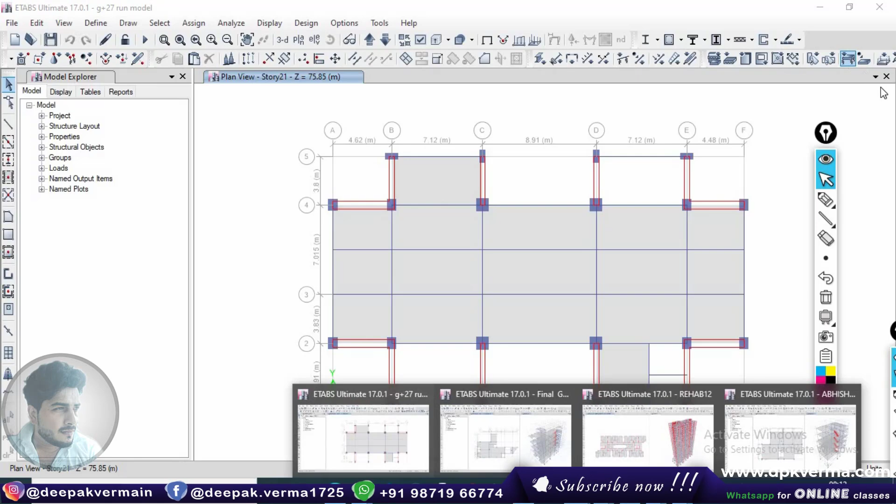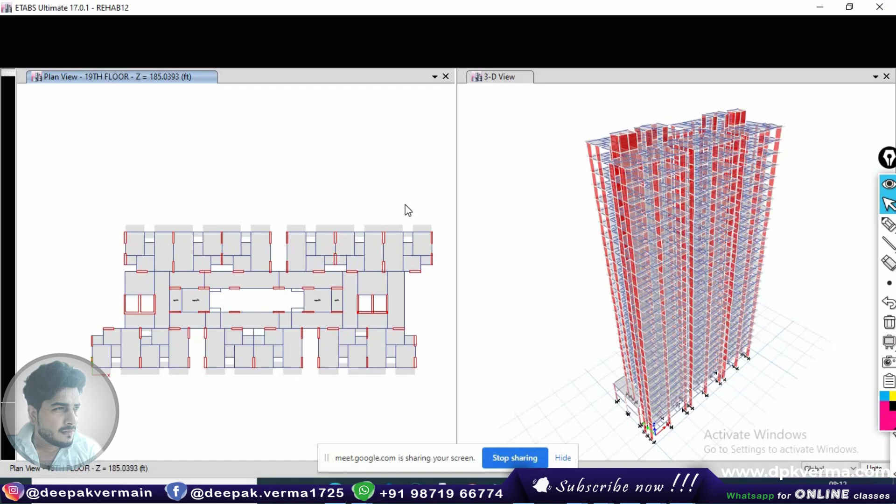So here are some ETABS models you will be working on. This is a high-rise building model which I will explain in our session. If you change the model, the concept will be the same. I have a number of models, but at the initial level you will not get all those things, so first try to understand the concept - everything will be similar, just a few concepts will be different. At the initial level we will be covering this ETABS modeling.

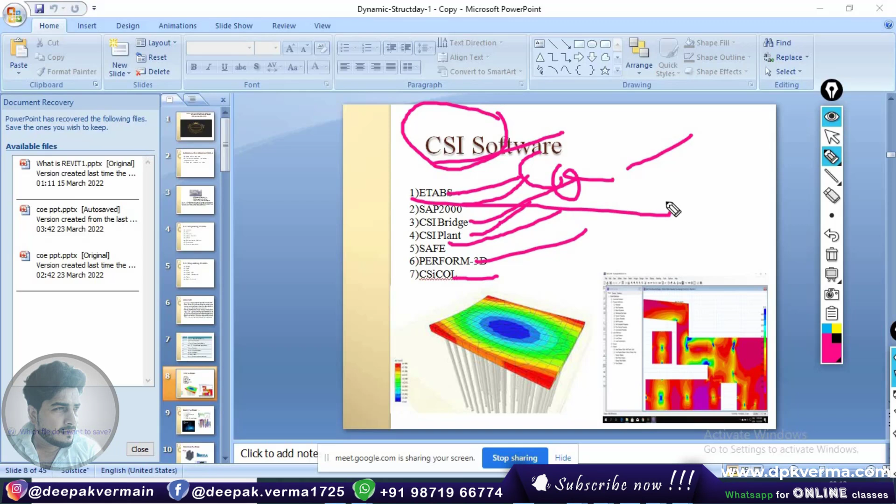CSI software - CSI is the name of the company, Computers and Structures Incorporated. These softwares are ETABS, SAP2000, CSI Bridge, CSI Plant, SAFE, Perform 3D, CSiCOL. Among these, ETABS is very important, especially for RCC building design, though we can also design a few steel structures. Mainly we use ETABS.

We can also use STAAD Pro. The difference between STAAD Pro and ETABS I will discuss in our coming classes, after you join our course. Just giving a brief introduction about the different software - CSI also made different software for steel structures.

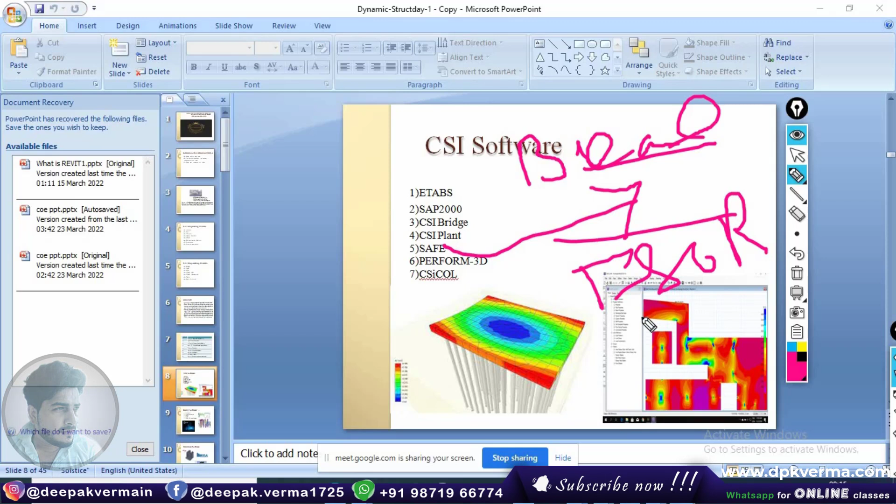What we can do in ETABS: beam, column, we can apply load on the slab, and for footing - isolated, combined, raft, raft with pile - everything we can design in SAFE. In STAAD Pro also there is superstructure and STAAD Foundation. In the same way we have SAP from the CSI company.

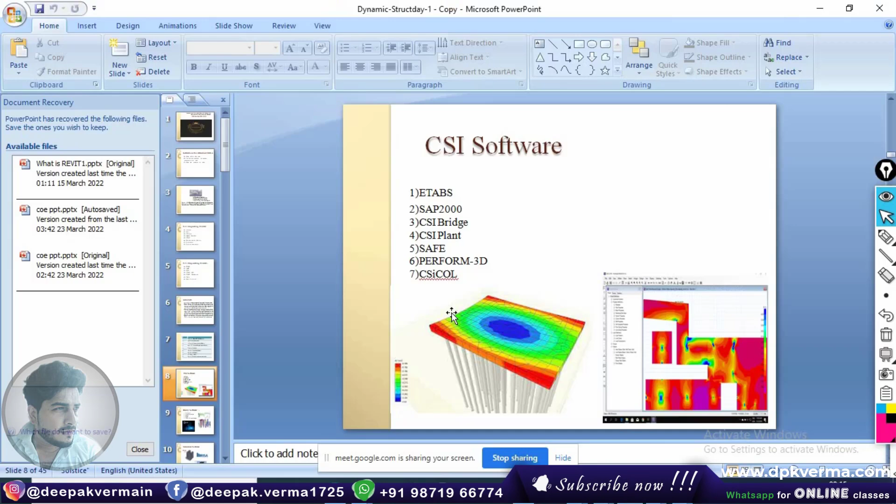We will be using this from next session, or after completing ETABS we are going to conduct the course of SAP plus RCDC. After that, Bentley, which is the name of the company who developed this software, STAAD Pro. Another is RAM, OpenBridge Designer. They have different software. There are a number of companies, not only Bentley and CSI, who made structure design software.

For RCC or structure at the initial level, it is better for you to learn ETABS. It is very easy. If you are at graduation level, it will help you complete your project. After that you can clear your concepts, or if you are pursuing post graduation, it will also help with your project. You can complete your project on STAAD Pro too, no issue. But why ETABS? Because the ETABS user interface is developed and adapted every year with changes, so compared to STAAD Pro it is very good, upgraded, and more user friendly.

First complete the first level, then we will use SAP RCDC. So just now I am explaining different software. At the initial level, ETABS is best. When you are learning, you will come to know its importance and how it is easy.

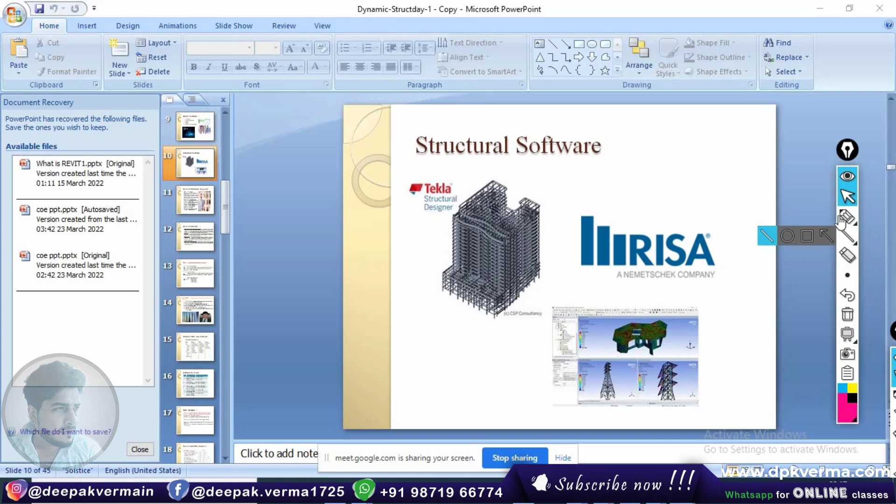Just a brief introduction I am giving - the role of a structural engineer. Most students don't know at the graduation level how a structural engineer works in a consultancy, so you should know the role of a structural engineer. Key tasks include preparing reports, design and drawing, making calculations about load and stresses, and selecting appropriate construction and material. For example, if a client approaches you wanting to construct a PEB, pre-engineered building, or steel structure, you should give an economical result - whether RCC or steel structure is economical. Only if you have knowledge about it can you give an economical result or suggestion. You should have knowledge about it.

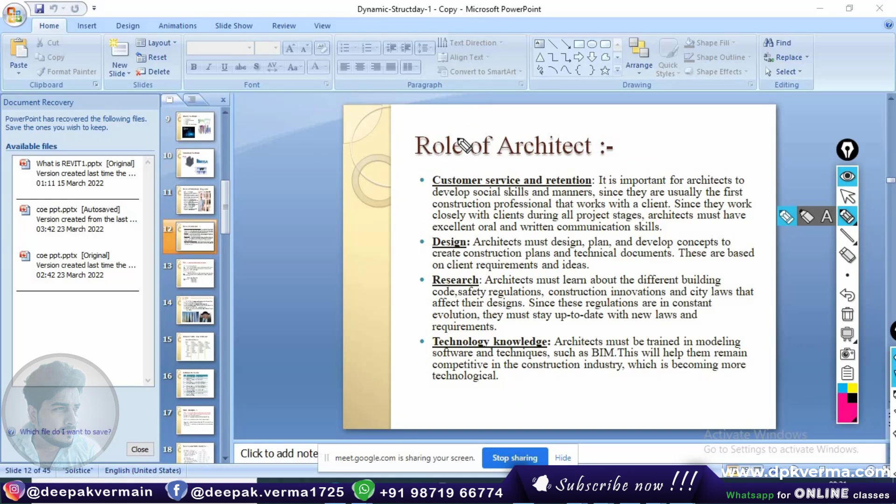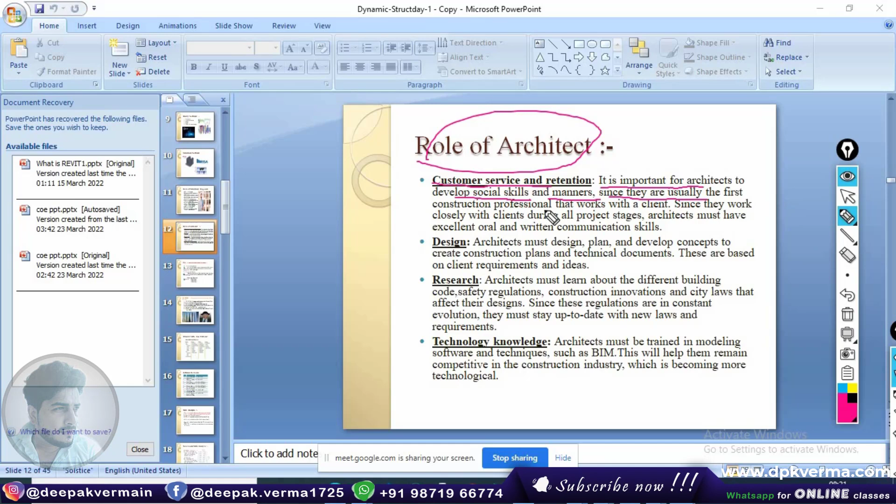The difference between the role of architect and structural engineer you should know. Customer service and retention: it is important for architect to develop social skills and manners since they are usually the first construction professional that works with the client during all project stages. Architect must have excellent oral and written communication skills.

Suppose Deepak Verma sir is the architect and I am a structural engineer - I should have very good communication skill. Not only with the architect, but with your client too. If you are architect, you should have good communication skill, be presentable, and convince the client. This is the role of architect.

Architect must design, plan, develop concept to create construction plans and technical documents. These are based on the client requirement and ideas. This is basically the difference between architect and structural engineer - a few points are collected in this PPT.

Research: Architect must learn about different building codes, safety regulations, construction innovation and city laws that affect their design, since these regulations are constantly evolving and they must stay up to date with new laws and requirements. This quality will enhance the architect's profile.

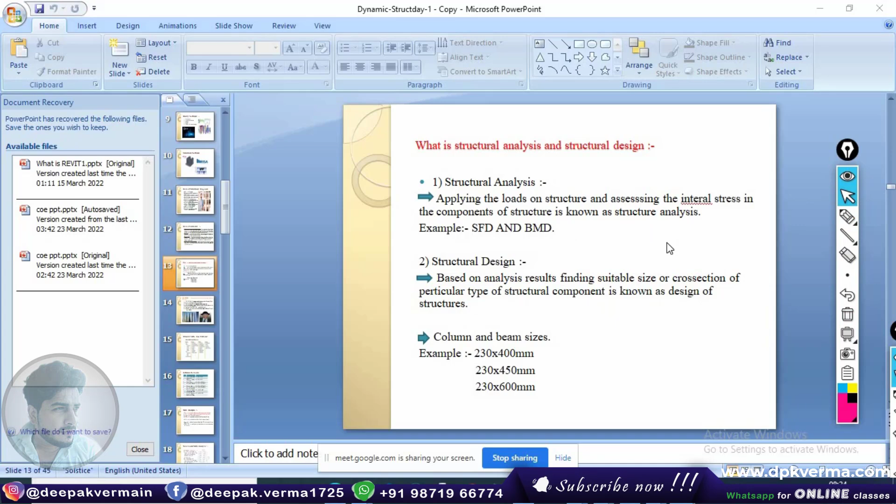What reinforcement area is needed for the section? What should be the suitable size needed? How much concrete is needed, and what amount of steel is needed to take that much load or satisfy that moment? This is just the basics of structural analysis and structural design that we learned in graduation.

Now basics about ETABS. Full form of ETABS is Extended Three-Dimensional Analysis of Building System. CSI ETABS - CSI stands for Computers and Structures Incorporated, the name of the company under which banner they developed this software.

They made this software. Initially, ETABS software was designed by a group of people who were masters students in 1975 at Berkeley, California. Founder and CEO of CSI is Ashraf Habibullah - the man is now CEO.

ETABS was used to create the mathematical model of the world's tallest building, Burj Khalifa. That's why we are taking the name of that - it's proven, used everywhere abroad.

While designing high-rise structures, we check the model using a number of software, not only one. After that, what ETABS can perform - while using any software, you should know the features of that software, its limitations and drawbacks. We should know this.

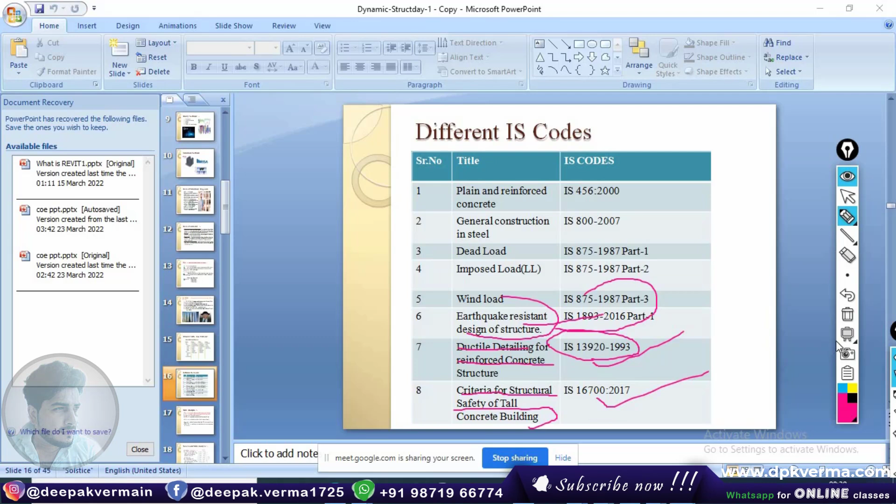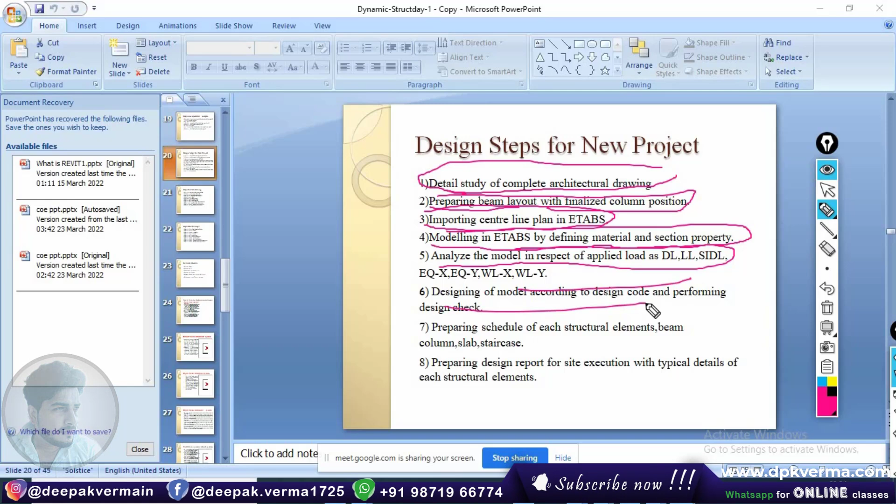If you are following that, you will get proper modeling, perfect modeling. We are training in such a way, like Deepak Verma training, that we perfect every software in a professional way - how we model it in a consultancy, we are explaining. Up to that limit we are teaching software. When we take any advanced course after that, we will be increasing our level.

May I know how many students are learning ETABS for the first time from this batch? Tell me in the chat box whether you learned before or this is your first time learning ETABS. Everyone, 22, 23 students are available. Your sir is asking about you. Okay, thank you for your messages.

These steps are very important, so we will be trying to complete them. Then preparing schedule of each structural element - beam, column, slab - and preparing design report for site execution, we will be explaining. Now we are entering the first step.

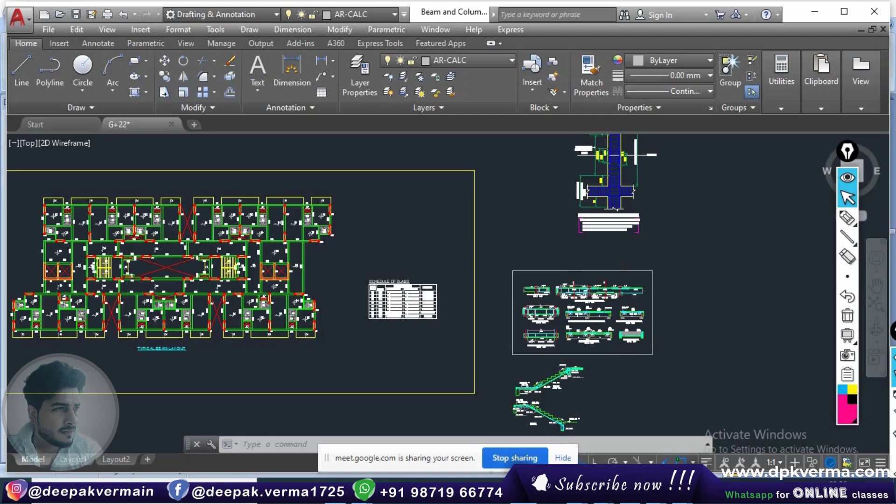Now we are going to the architecture drawings. First we will take G+3 for the modeling, G+3 complete. From that, see how many typical cases - I am having hundreds of projects in my PDF, but understand the concept, then you can make it.

Suppose you complete the AutoCAD course in 1 month or 1.5 months, you can draw a number of plans like that. First understand the concept in this course, you will get the proper idea. I am having different architecture plans on which we have worked, but I will not show those - basic plans I will be showing.

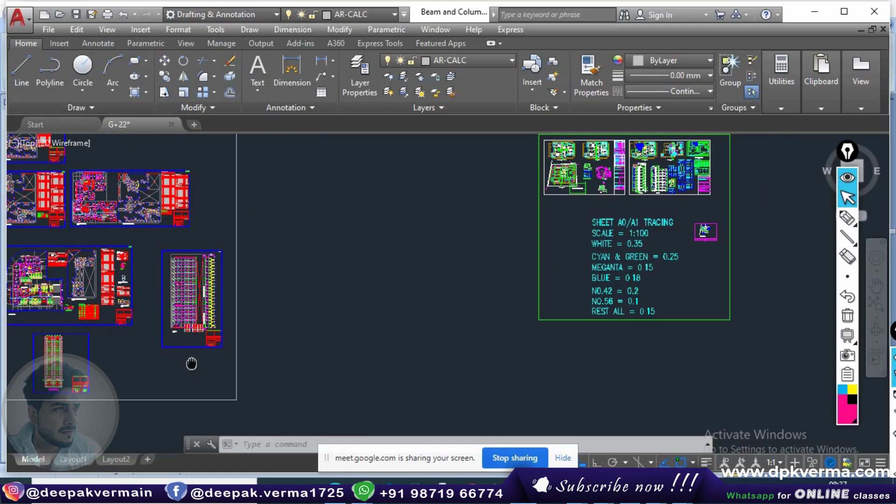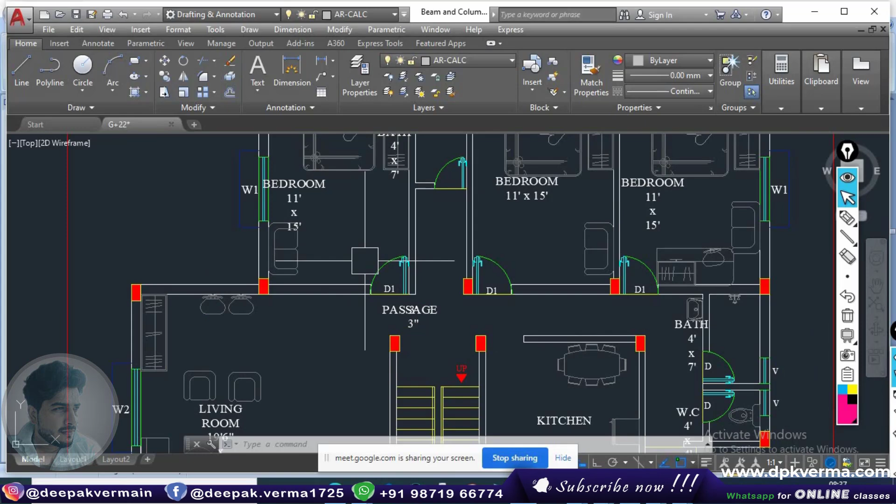At the initial level, suppose it is a G+3 complete building - ground floor, first floor, second floor, terrace plan is given. First you have to understand how the architect or civil engineer has planned that site - it's basic. Where is the bedroom, staircase, everything - you have to study it, so you can give suggestions to the architect on where to apply the column for stability of the building.

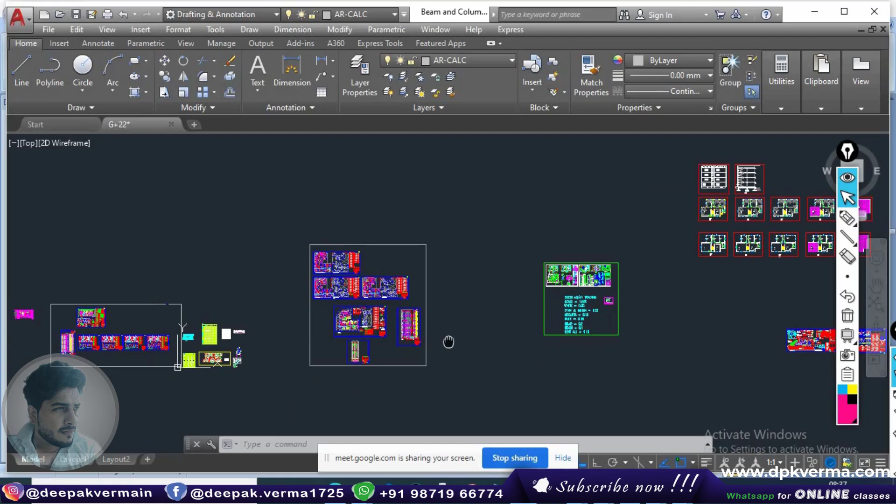I am having other plans like that too - suppose we are getting plans from the architect, such RCC structures I have worked on. You should read it - where is the bedroom, where is the lift, staircase - then you can look at the column positions and give stability where important. If the architect doesn't want a column anywhere, you can give the solution, or otherwise increase the size of the column there. This type of professional discussion happens between the people joining a construction project - between structural engineer and architect.

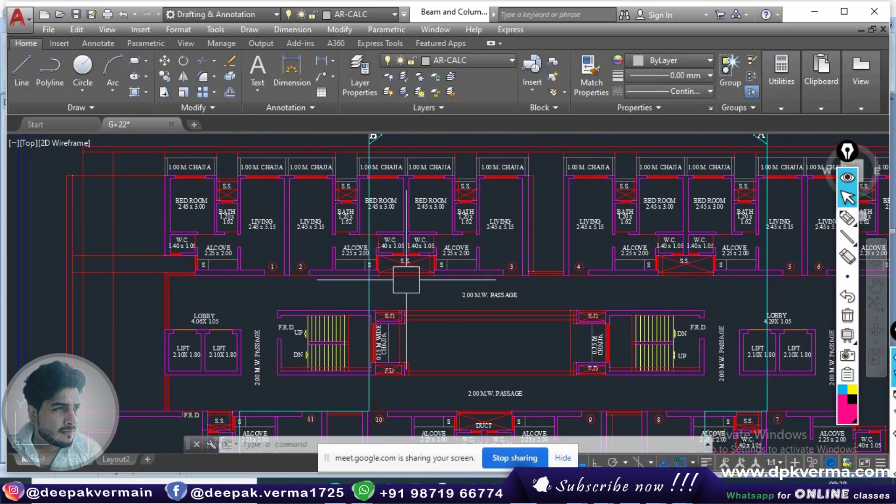Okay, structural engineer or architect provides this plan, after that we will be locating the column. Then you will be making beam layout. Just suppose such type of beam layout we have to make - typical beam layout you have to make.

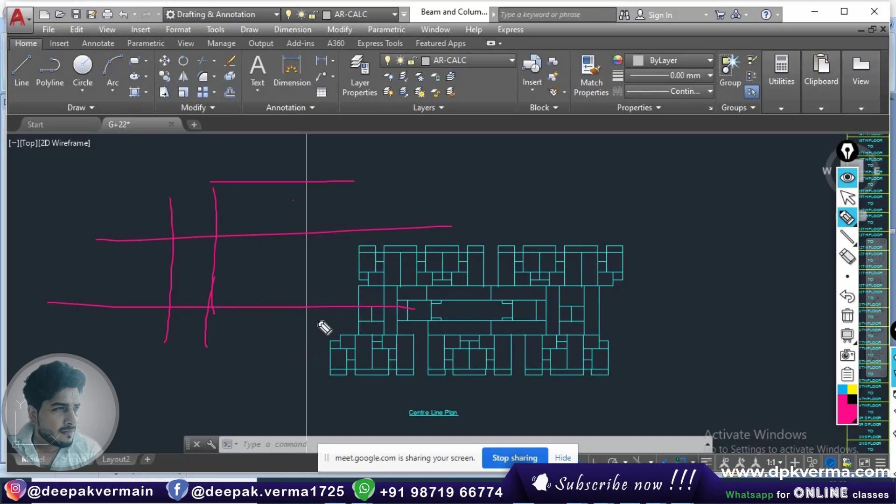Okay, how do you make a center line? There are number of methods to work in ETABS. You can draw the plan using grid - one method those who have used Revit know very well. Or other method is to make a center line in CAD, then you can import it.

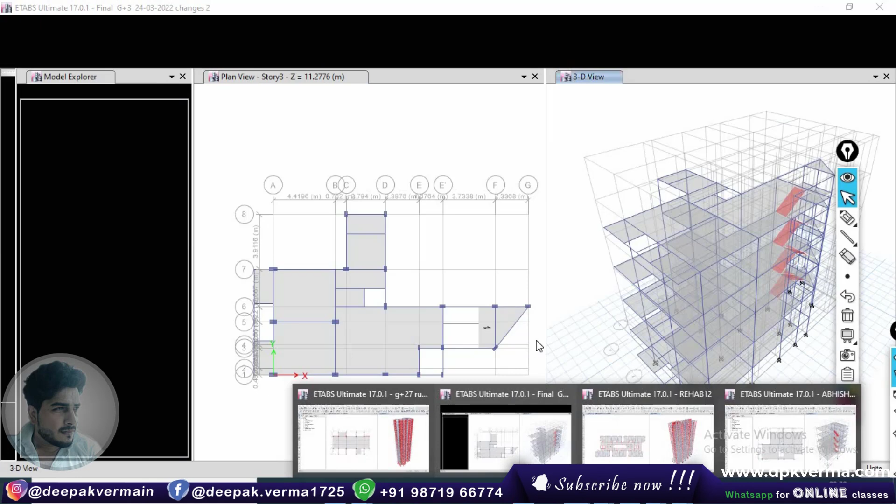For the small structure, making grid is easy. For the complex structure, you need to make a center line. Just I have made this basic G+3 structure using grids. Or suppose another structure, we have used the center line for this.

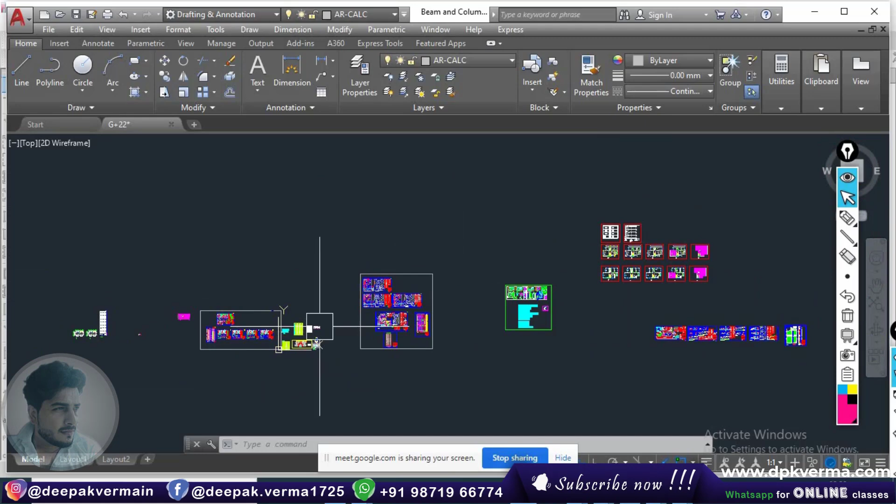So just basic, we are taking this project G+3, G+2, or 1 or 2 projects for practice I will be giving to you. Don't take tension, I will clear all your doubts. This high-rise project is also a live project, we will be taking this in our course.

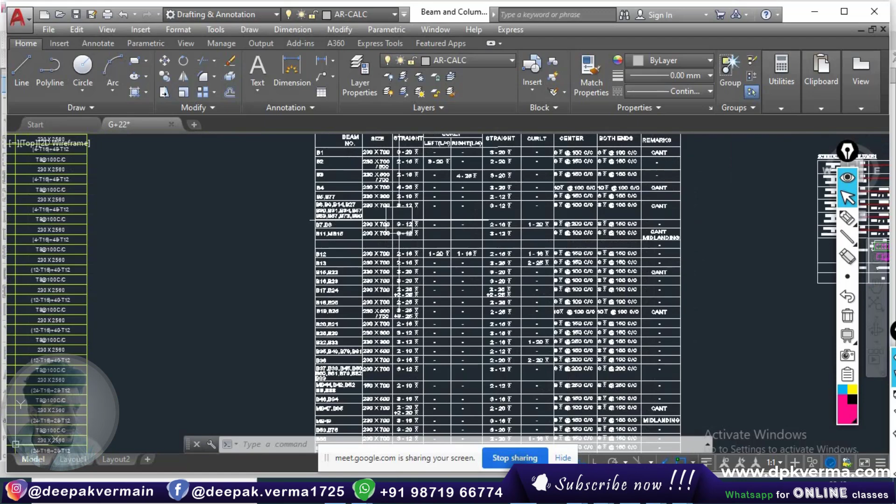Complete scheduling and detailing of low rise, or G+3, you will get the idea. Same method you have to follow for the high rise. We will be explaining about such type of schedule of beam, how to take the data from ETABS, how to make column schedule - we will be explaining properly.

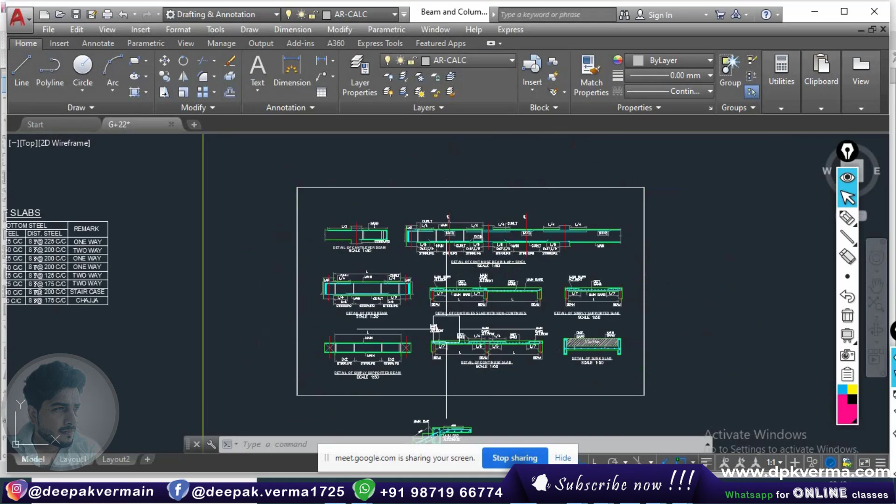How to make detailing - basic important points we will be discussing. Detailing of slab, beam, staircase, everything we will be discussing, and how to make slab schedule.

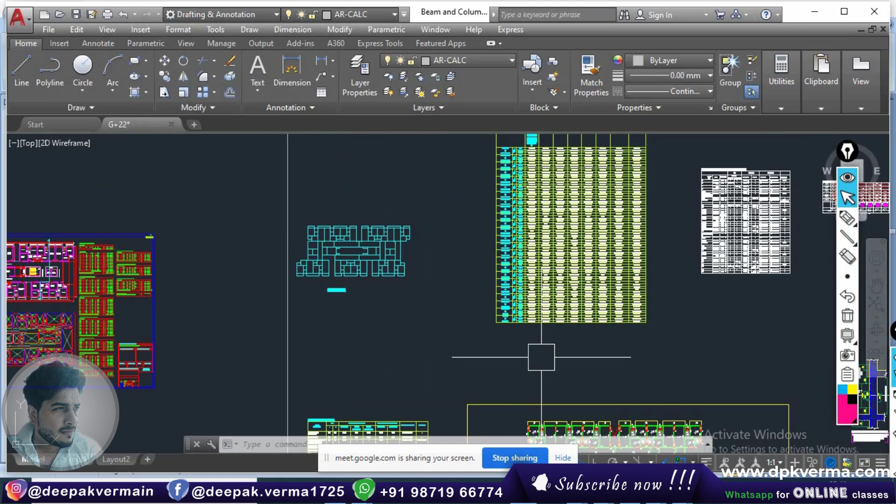Then another step is importing the center line - I have told you that this center line is made in CAD. Modeling in ETABS by defining material and section property - what this means, I will tell you. Just suppose this is a basic structure, suppose I have defined the material property now.

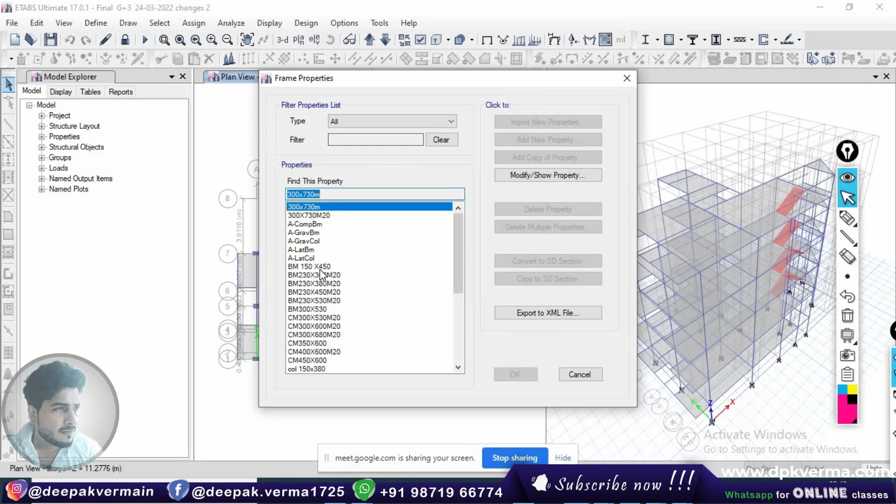What are we defining? M20 - grade of the concrete, grade of the steel. First step is to define it. After that, section property, different frame sections - beam section sizes, column sizes, different sizes we have to define. After that, section sizes of slab - what thickness of slab you want.

After that, define every step of defining we will be ending. Then these are the response spectrum, mass source, P delta - I will be explaining in our course.

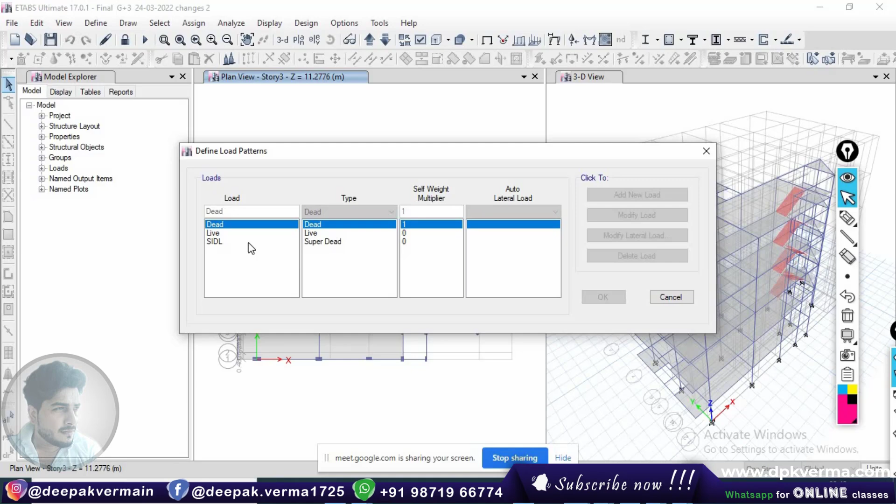Then load pattern - if you are designing your building for dead load, live load, or earthquake load, so the load cases, where different load combinations are there. How to define it, what is the importance of that, how to take it from the IS code. This defining part is over.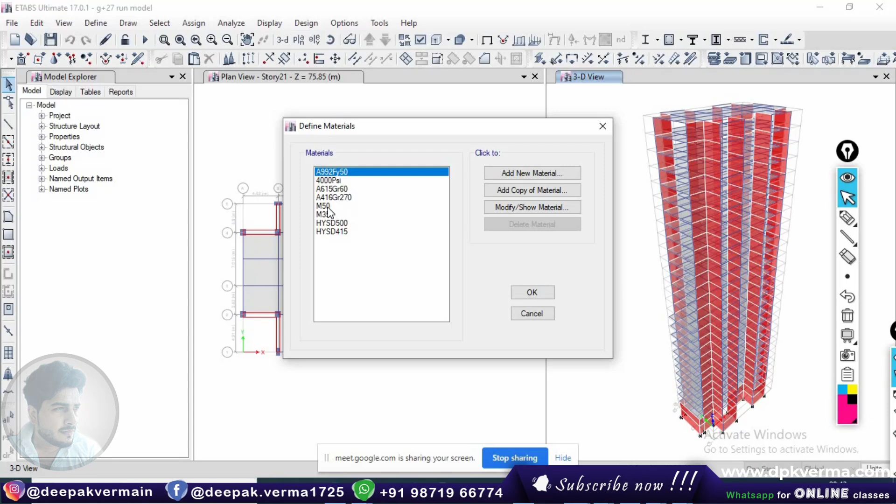Then in the same way we have to do the defining part of material for a high-rise building differently. So we are having different grades - M35, M50, whatever - for high-rise we will be using higher grade of concrete. In the same way, we are defining section frame sizes - sizes will be different, beam sizes 450, 900, 500, 1000.

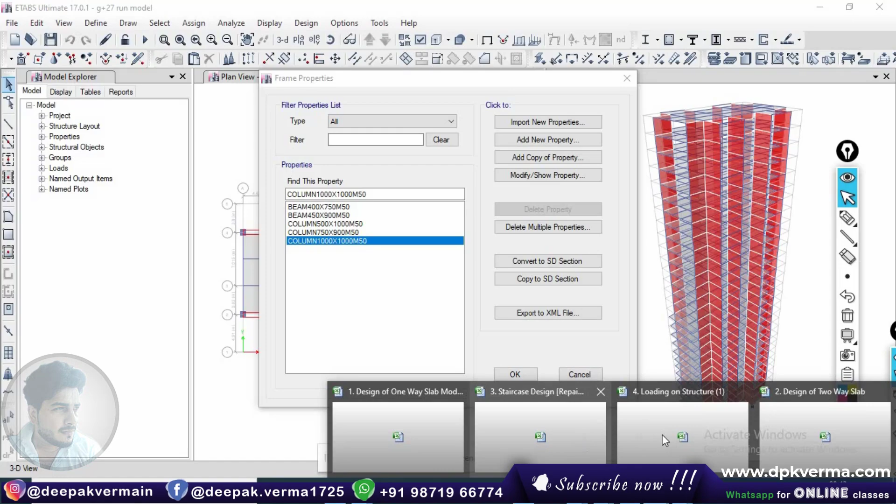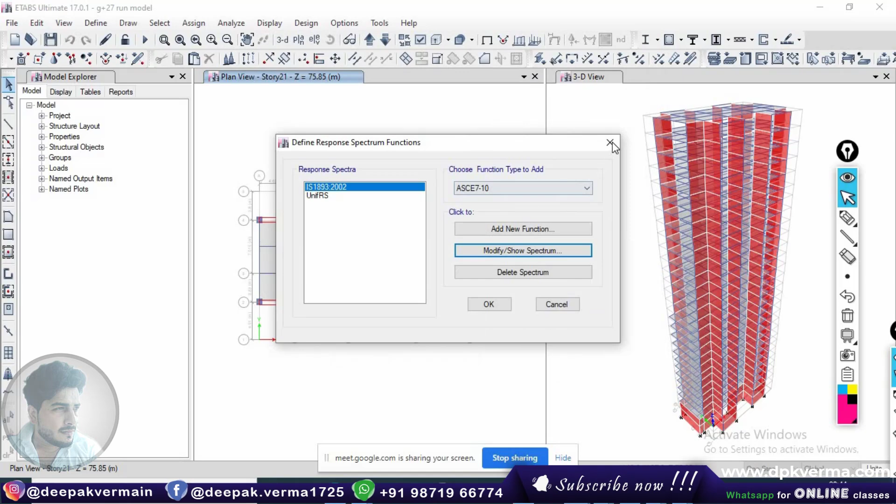Then after that, here we have defined response spectrum analysis, importance of that - how to take, how to apply all the values, how to put all the values here, importance of P delta analysis. Then load pattern - different load patterns we have applied: dead load, live load, earthquake load, wind load - everything we will be discussing.

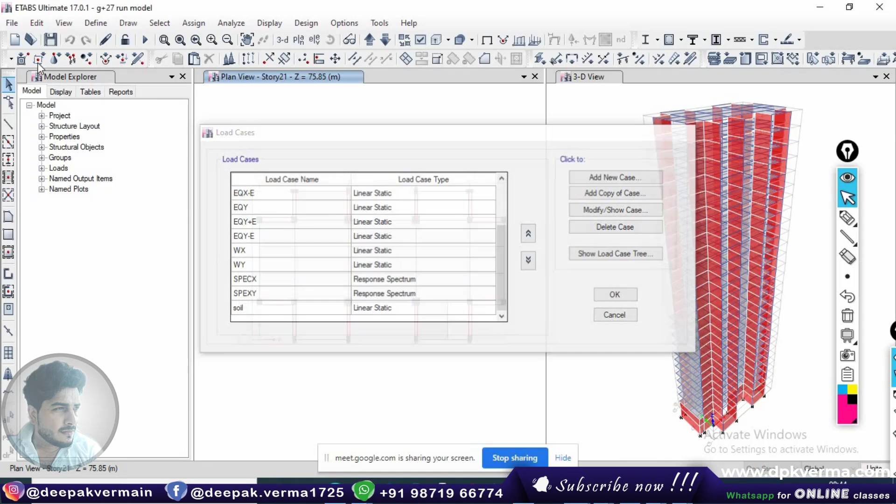Then after that, load cases - how to do scaling, importance of releases, everything we will be explaining in detail. Different load combinations - for high-rise there will be load combinations around 75 to 100, everything I will be explaining to you. This is the first step of defining material in ETABS.

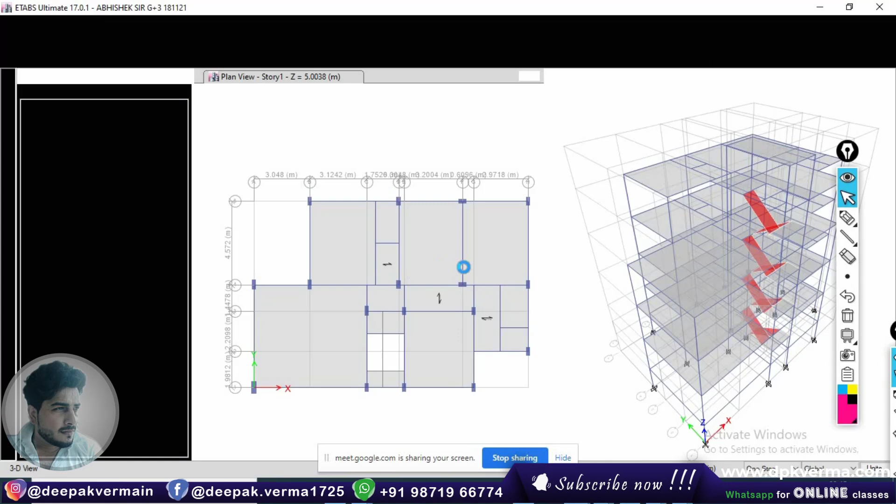Same thing I have shown you, I will be explaining about it. So it is as simple - as you move forward, you will be getting the concept about it. This is the first part. Got it? Tell me in the chat box what I am explaining.

We are having brands, suppose StaadPro, Tekla, another. There are not only two software, number of softwares are there. It's similar, just graphical advancement is better than StaadPro, but it's the same concept. If you are working in structure and want to join any structure consultancy, it's better to learn number of software, it will help you and enhance your ability. There is Adapt software for pre-stress, Tekla for another purpose, and for finite element analysis also, different softwares are available.

ETABS is best for RCC, not only better. ETABS is better than StaadPro normally. Those who have learned StaadPro will find it very easy to learn. I think you should just know the concept, it's the same thing.

I will give a basic example. You are having a scooty of brand TVS, or Honda, or another company. Whatever the function will be same, just the body will be different. The presentation, stylish body of Honda, another brand has another presentation, different colors like that. All software is like that, in AutoCAD also there is ZWCAD also, so number of brands like that, they are like brand only.

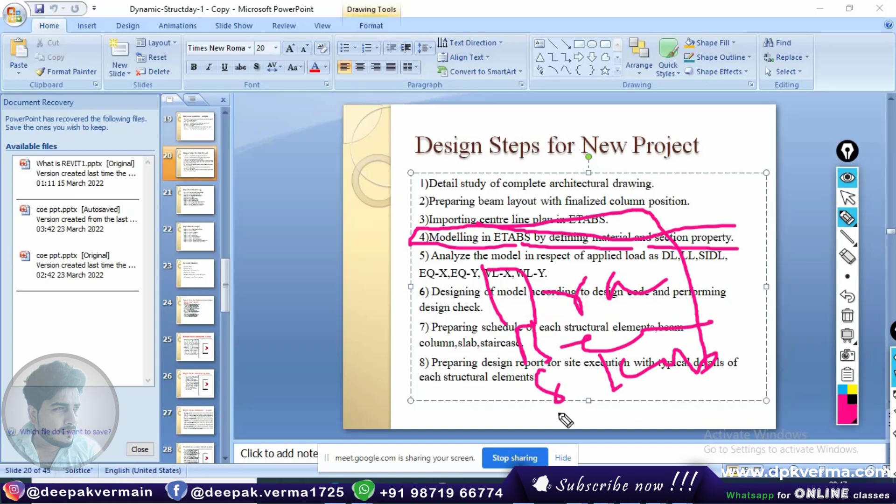चलो अभी हम क्या करते हैं, पहला स्टेप हो गया - first step, you have completed defining material and section property. After that, the step is draw it - whatever we have defined, beam sizes, column sizes, slab sizes, everything we have defined, we have to apply. So how to apply?

Just basic, I can show this or this, no issue. Just first step is just go here, first step you have to follow - draw the column. Just first step is apply.

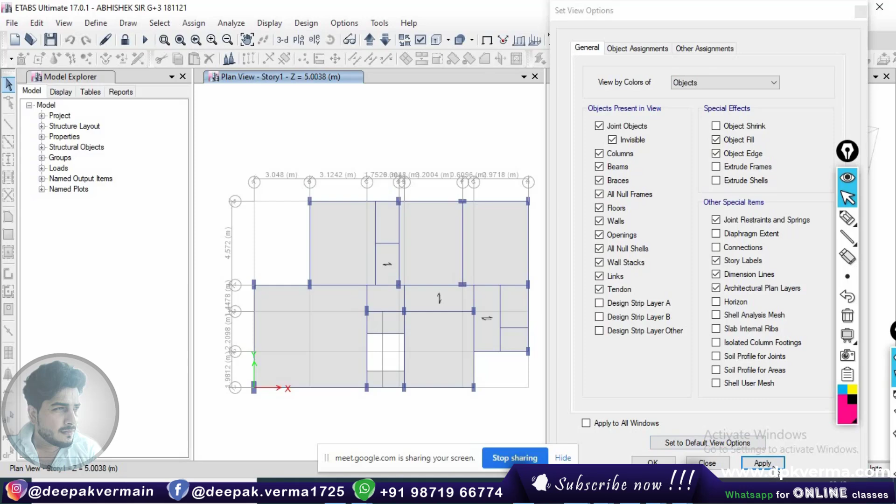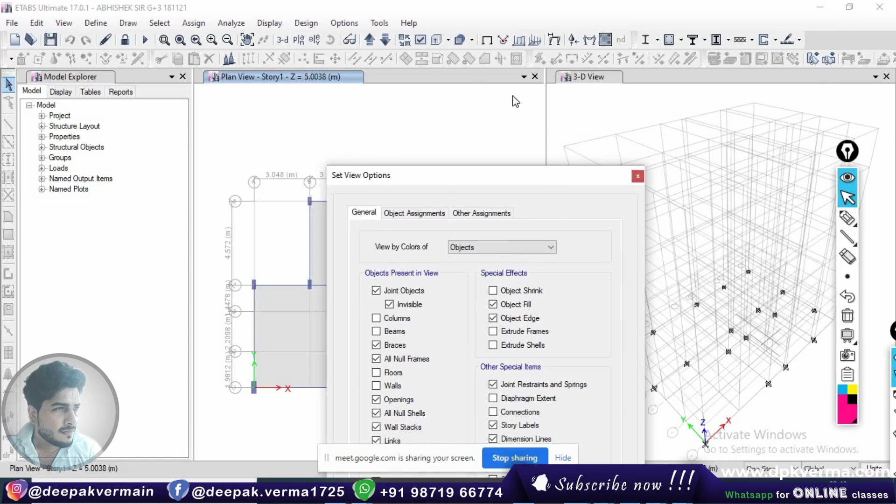Yeah, it's taking here. Okay, just I will explain column, beam, floor, wall. Okay, why it was not showing? Because there are number of windows in ETABS. Just by default it goes from here to here, we change it like that.

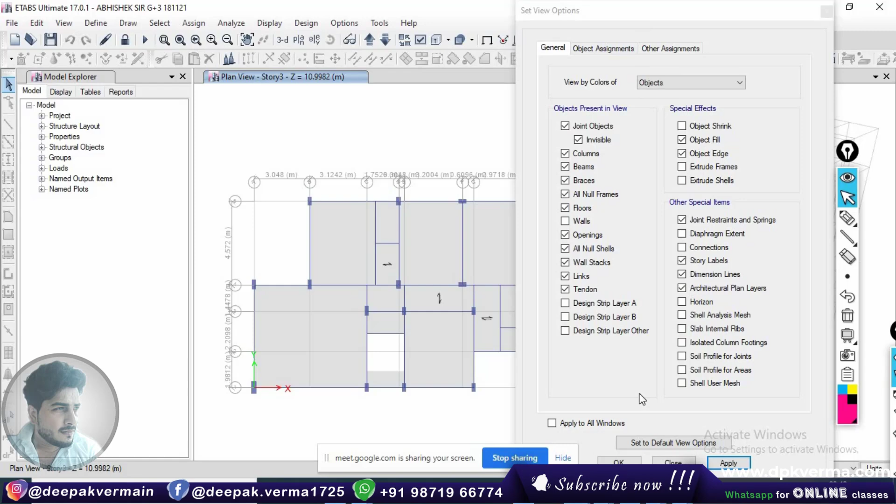Suppose first step is draw column, another step is draw beam, after that load - applying the load is the first step. In the same way, these blue colors are the symbol of column, you know, and these are the symbol of shear wall.

We will be explaining where to use shear wall, where to use column, the orientation of column, different positions and what will affect. These red are the shear walls. For high rise, we prefer shear wall because it has more resistance to lateral load - earthquake, wind - it's more economical, better than column.

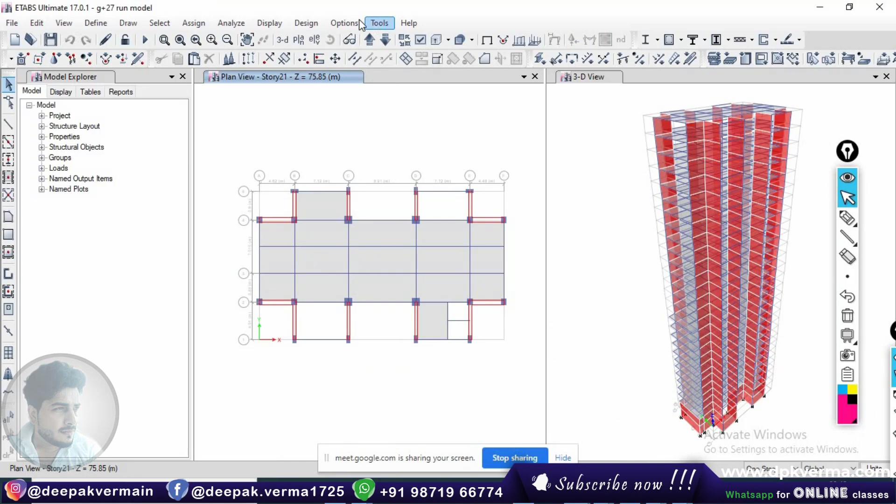So अभी हम देखेंगे what we were explaining - just draw column, beam, slab is over. After that, in the same way for high rise, I am explaining you, just in the same way for all the projects you will be following the same thing. Okay, wall.

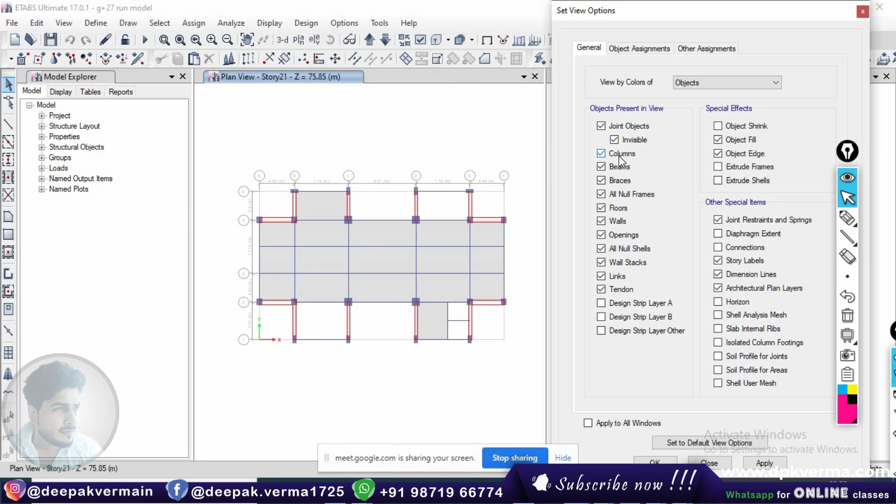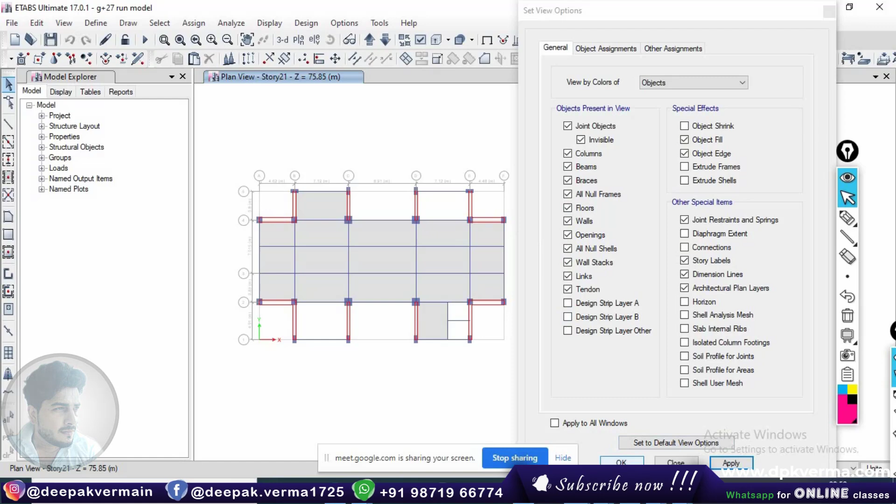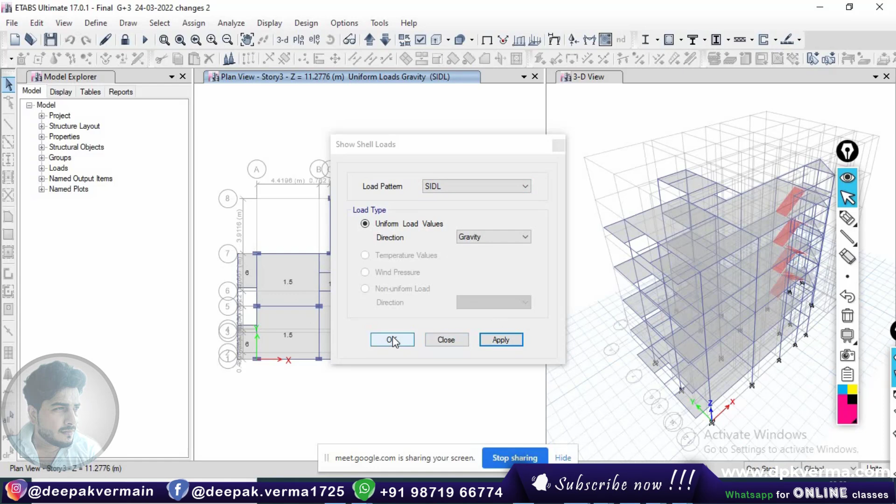Just suppose column, beam, wall, floor. First step column, second step beam, you can take wall - wall is nothing but shear wall. Then floor, then applying the load, you should go for the load. Then we have to apply wall load - how to apply this load, dead load or SIDL, how to calculate it, then there will be SIDL. After that, how to apply floor load, importance of that, how to check from IS code, importance of that, everything like that.

ये हो गया आपका अप्लाई करना - this is your applying done. In the same way we can apply in high rise, I am just showing that to interact with these models. After that, applying load is over, then you have to go for the analyze - no, after that defining of different loads.

After that, load combination, different high rise concepts, different response spectrum, P delta, everything. Importance of pier label, how to assign shear wall - everything we will be explaining. Then design of model according to design code, performing design checks, preparing scheduling of each structure element.

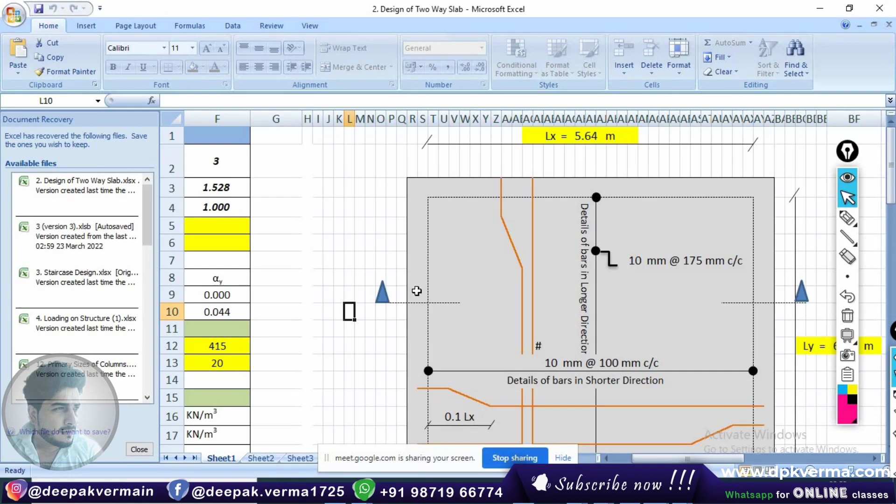After that, suppose we apply load on ETABS. ETABS does not design slab, so we have to export the data in SAFE. For that, some consultancies use Excel sheets, so we will be discussing about the Excel sheet and how to use it. It is very easy - we are having a number of Excel sheets, no issue.

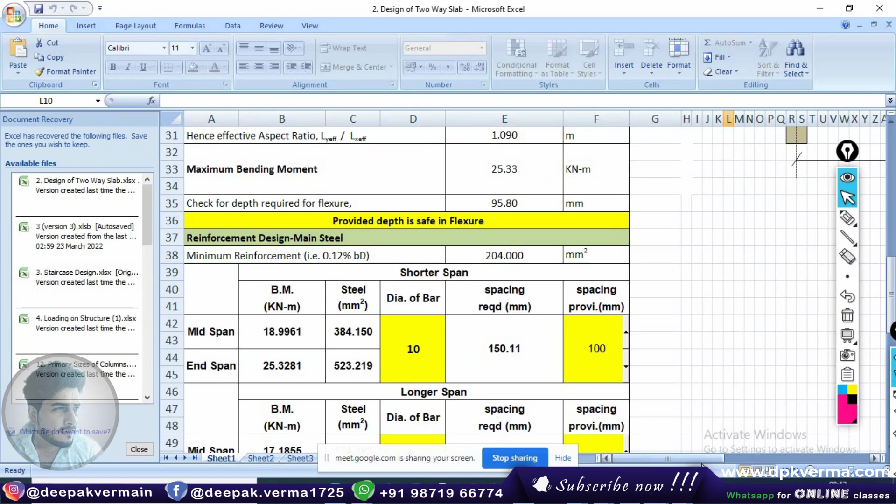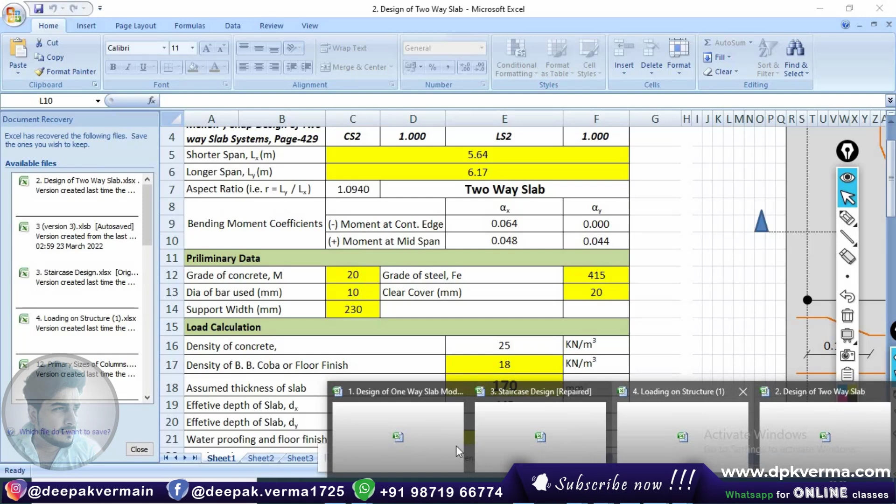This is not only one, we are having 4-5 Excel sheets. In our course we are giving this material free - loading on structure, one-way slab, and different Excel sheets.

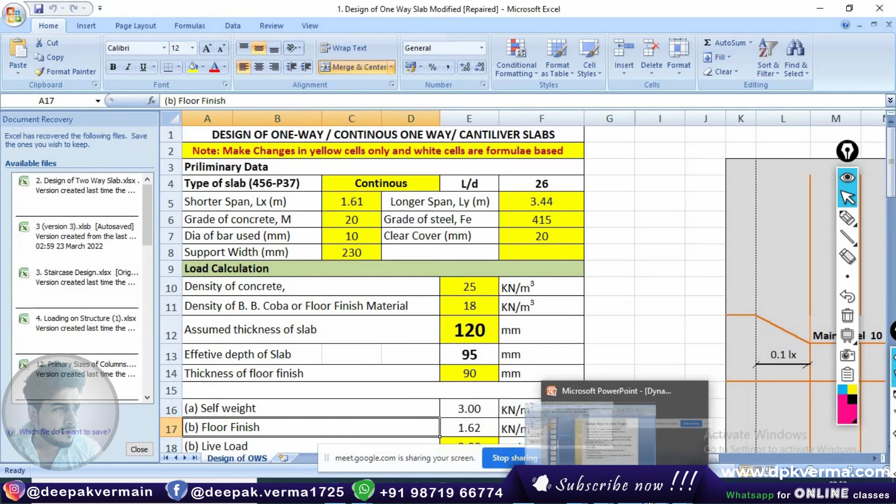So this is about the staircase. We will be discussing about the staircase Excel sheet - just telling how to use it. Different Excel sheets are there.

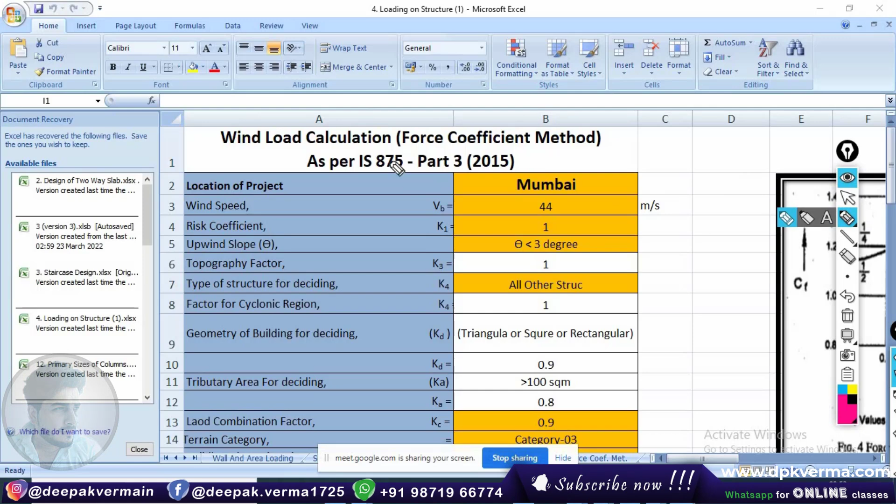Loading on structure, how to apply wind load - there are two methods to apply wind load in structure. For low rise structure we go for the force coefficient method, for high rise it is preferable to use the gust factor method. We won't discuss that now, this much is sufficient. Let's see what other points to tell.

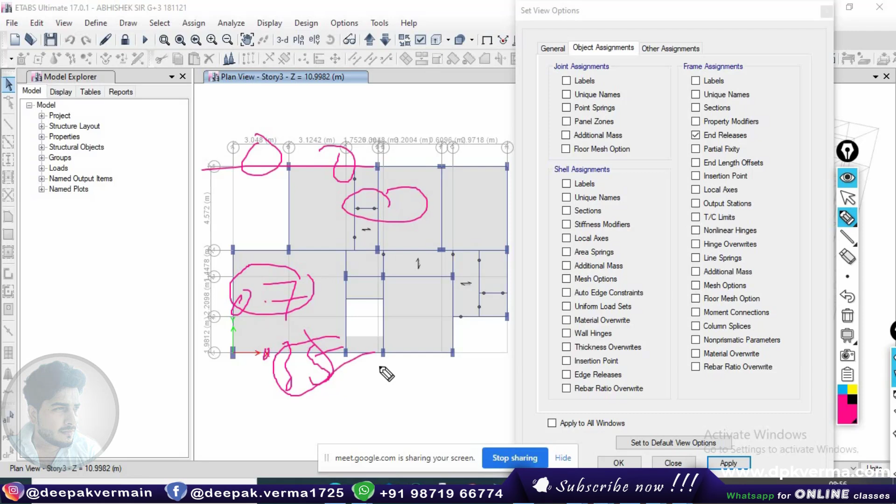For property modifier, value is given in IS code as 0.7, 0.35 or something - for beam, for slab, for column it is given. We will be discussing this in the HRS project.

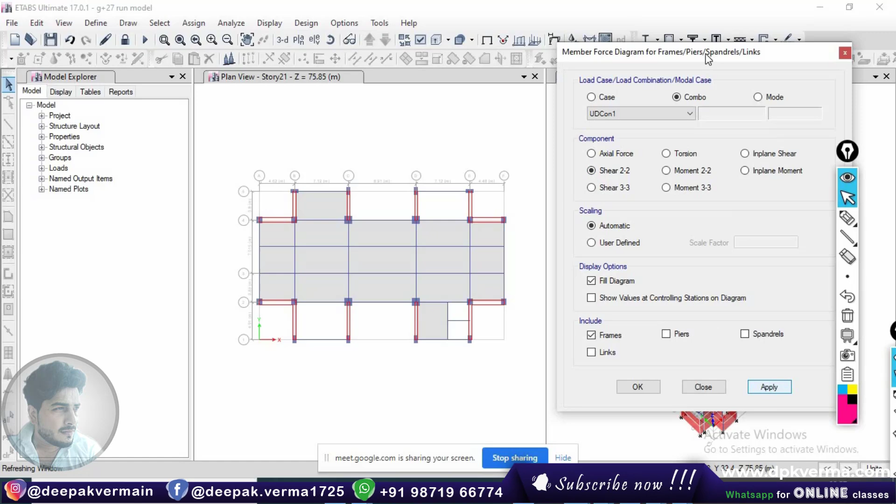बहुत सारी चीजें हैं इसके अंदर, ऐसा नहीं है कि इतना ही है।

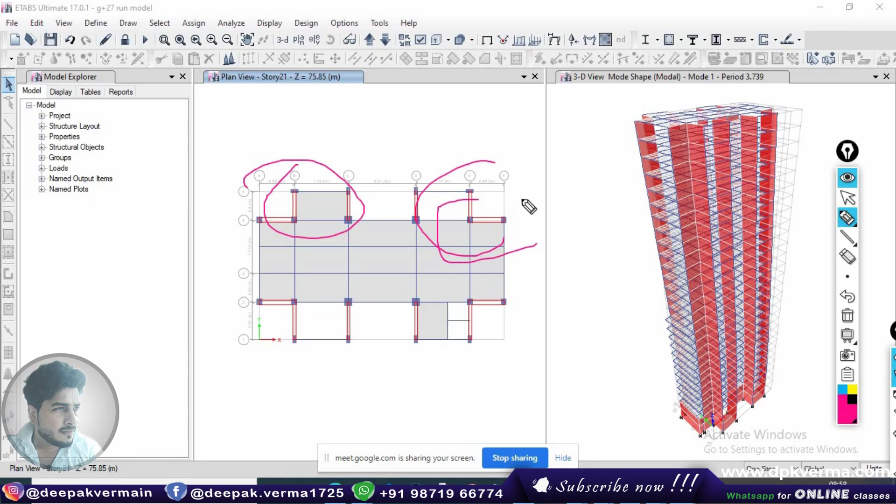अभी और भी कंसेप्ट मुझे बताना था, इसके अंदर एक मोडल मास का कंसेप्ट है। आईएस कोड बोलता है सपोज जो भी आपने शेयर वॉल कॉलम लोकेशन किया है तो उसकी वजह से बिल्डिंग का बिहेवियर कैसा होना चाहिए, नंबर ऑफ मोड्स कैसे डिसाइड करें। फर्स्ट टू मोड्स शुड बी इन टर्म्स ऑफ ट्रांसलेशनल मोशन, टॉर्शन इज अलाउड इन द थर्ड मोड। इंपॉर्टेंस कैसा है, टाइम पीरियड कैसा होना चाहिए, फ्रीक्वेंसी क्या होना चाहिए, नंबर ऑफ मोड कैसे डिसाइड करते हैं - जो एमटेक के हैं उनको पता होगा शायद, जिन्होंने किया है।

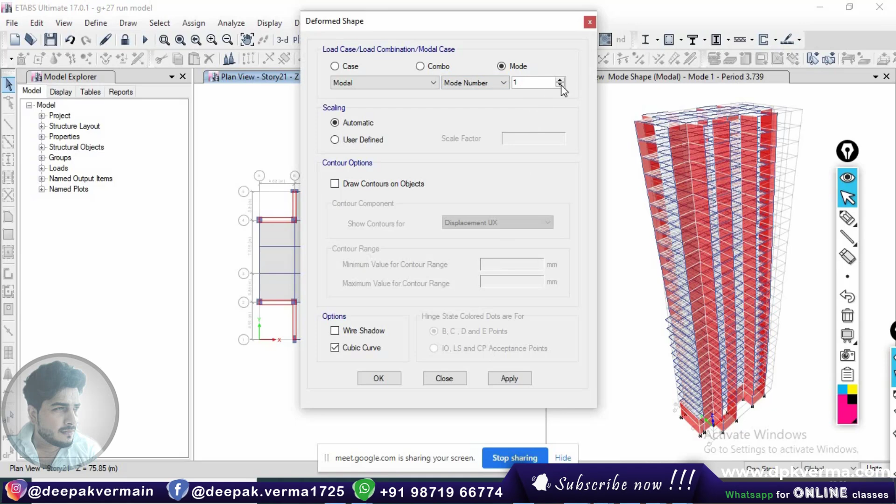इससे बिहेवियर आपका पता चलता है। नंबर ऑफ थिंग्स यू कैन चेक, ये आपको एनिमेशन के साथ दिखता है बिल्डिंग का। फिर इसके बाद हम लोकेशन ऑफ कॉलम, शेयर वॉल वगैरह कर सकते हैं। कभी कभी ऐसी कंडीशन आती है कि आप यूज कर रहे हैं, एबनॉर्मल कंडीशन से क्या होना है।

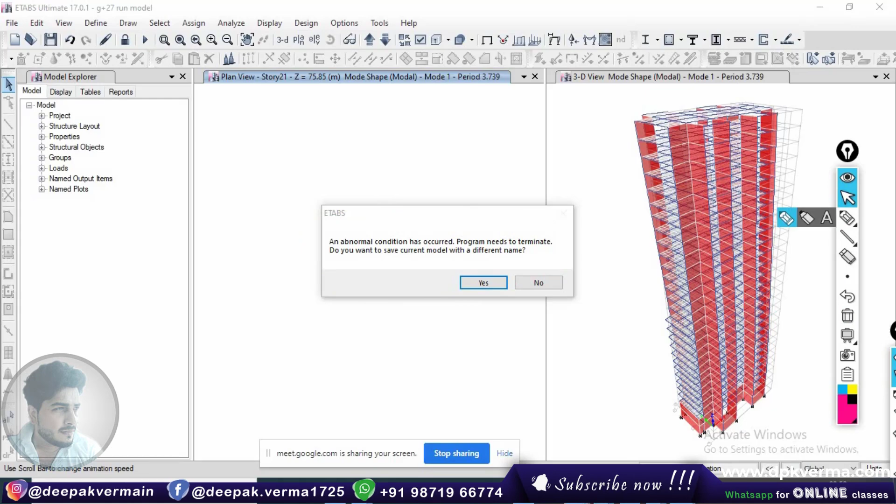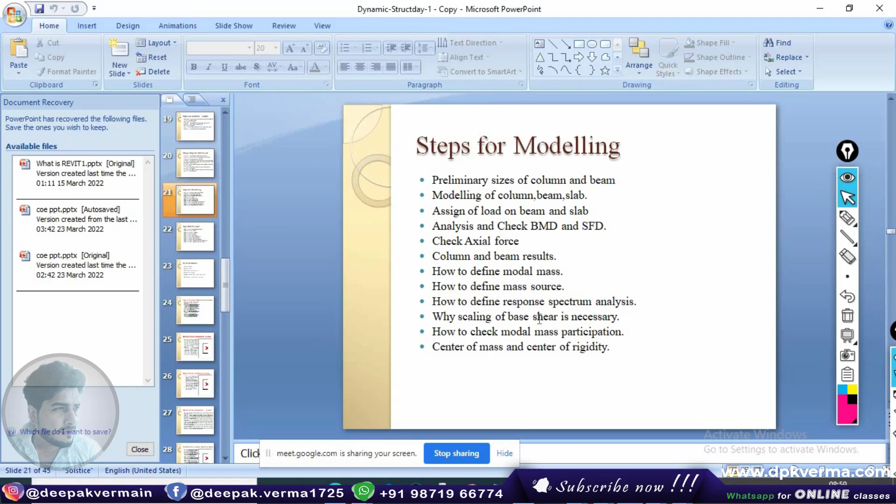ऐसे कुछ पॉइंट्स हम डिस्कस करेंगे, इसीलिए मैंने 2-3 फाइल ओपन करके रखी हैं। ठीक है, ये कंसेप्ट थे जो आपको बताना था, डिस्कस करना था। फिर देखेंगे जिसको शायद लाइक हुआ, समझ में आया। और एक ये अपना ब्राउज़र भी था।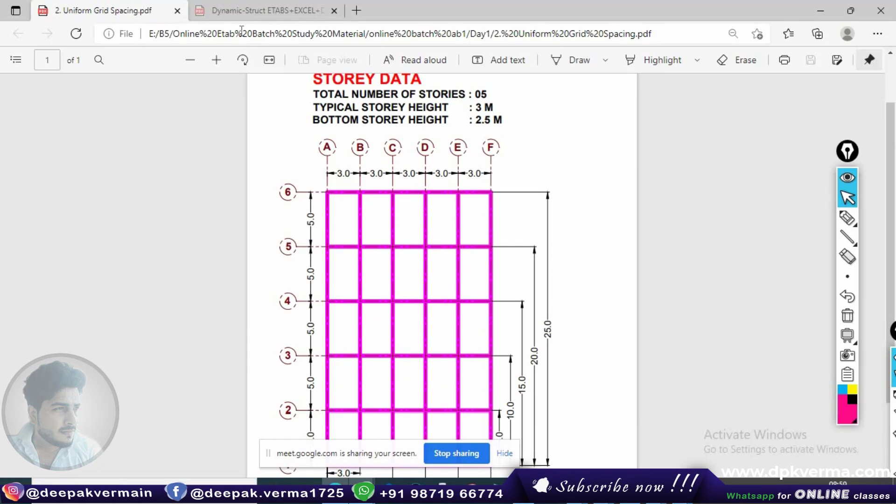करेक्ट है ना, मैंने शायद लिख रखा था। अभी तो इतना समझाने की शायद ज़रूरत नहीं है, मैंने एक्सप्लेन कर दिया। बेसिक चीज़ें देखो, ये सिलेबस आपको दिया गया है, मोस्टली सारा पोर्शन आपको कवर किया जाएगा।

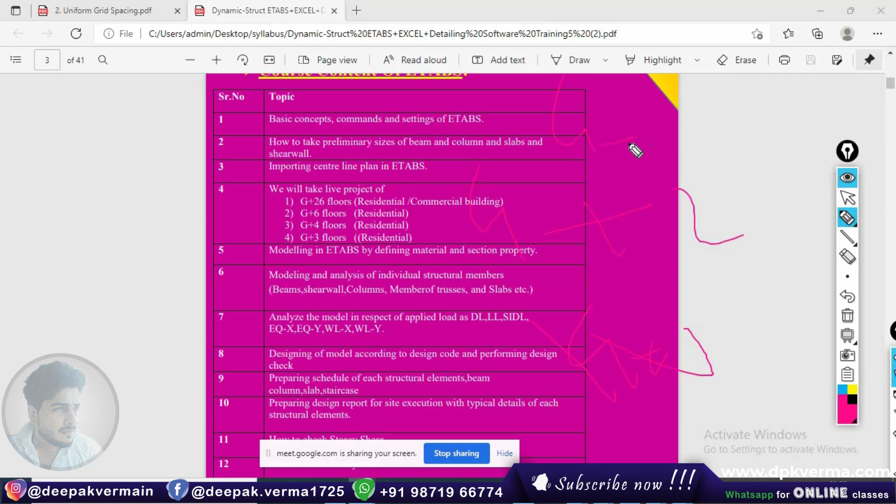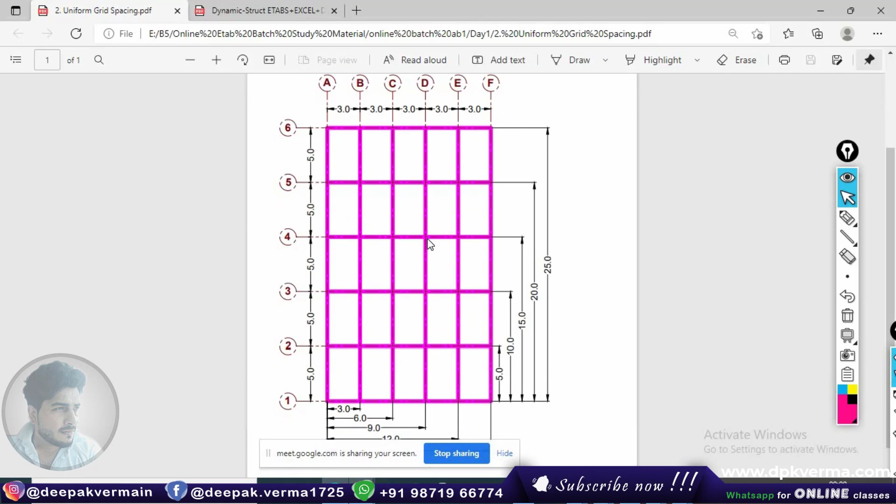उसके बाद ये यूनिफॉर्म ग्रिड स्पेसिंग, जिसको अभी हम फर्स्ट लेक्चर में बताएंगे। मैं और लेक्चर लेना सोच रहा था कि कैसा पढ़ाते हैं ईटैब्स को, कैसा किया जाता है, तो वो हम सेशन में ही लेंगे। इंट्रोडक्शन दे दिया गया है आपको। किसी को कोई डाउट है तो चैट बॉक्स में आप लोग बोल सकते हैं।

प्लीज टेल मी डायनेमिक एनालिसिस - हाँ बताएंगे, अभी नहीं बताएंगे, अभी सिर्फ इंट्रोडक्शन है। साकिब, जो भी है आप मुझे पर्सनली कॉल करो, मेरा नंबर ले लो। सर बताइए सर नंबर - हाँ मुझे कॉल कीजिए, और कुछ डाउट है तो मैं आपको बताऊंगा।

अभी ये सिर्फ इंट्रोडक्शन है, और जो भी आपको क्वेश्चंस हैं आप चैट बॉक्स में बोलिए।

अभी आप सीख तो लो पहले, इसमें अभी ज्यादा रिजल्ट्स वगैरह एक्यूरेट ही होते हैं ईटैब्स के। सर ने कहा है हैव ऑलरेडी बेसिक इंफॉर्मेशन ऑफ ईटैब्स - आपको नॉलेज है क्या ईटैब्स की? यस सर, यस। कोई बात नहीं, मैं आपको डिटेल में बताऊंगा आपको कोर्स ज्वाइन करना चाहिए या नहीं करना है। आप जिसको जो इंटरेस्टेड है चैट बॉक्स में बताओ।

नहीं बस डायरेक्ट आप मेरा नंबर ले लो। Yes sir, yeah we will be explaining in our next session. We will be conducting the next session for SAFE and RCDC or SAFE. Yeah we will be telling. No, we are not teaching how to work in Excel. Dekho, if you have done in Triple C, they have shown how to use Excel. Okay, normally we are having Excel sheet, I will tell you how to use it, but how to prepare I will not explain, because we are not having that much time. It is basic - if you are facing problem in how to make an Excel sheet, normally go to a book and take some example from RCC design. Just follow the steps of the Excel sheet, how to take the data in Excel, so you will be able to make it.